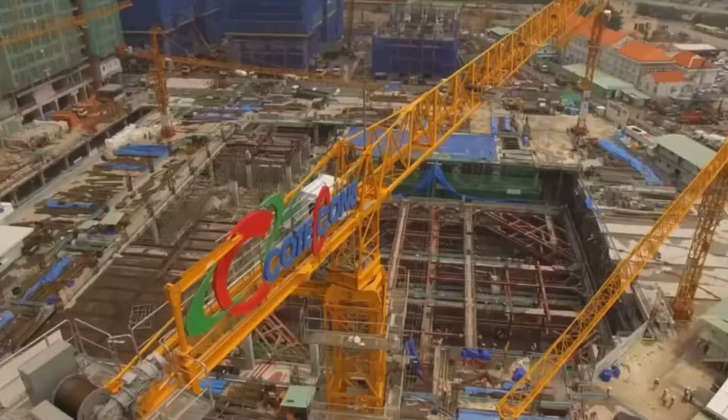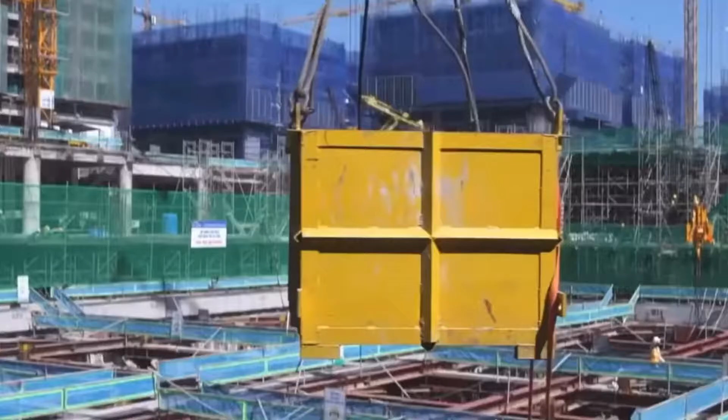The construction industry is a major contributor to the economic development of Vietnam. Today, our team will help you have a closer look into this intriguing industry.

In the past 2 weeks, our team has been at Constrexim CDC Hanoi to learn about the company's current situations and the difficulties it is facing. We had a chance to talk to the CEO and some workers to have a broader look into the company and the construction industry in general.

From here, various models and methods have been developed to detect main problems, figure out big ideas, and calculate the cost of the problem and the solution. In the first section, we will provide you with some basic information. The first part is executive summary.

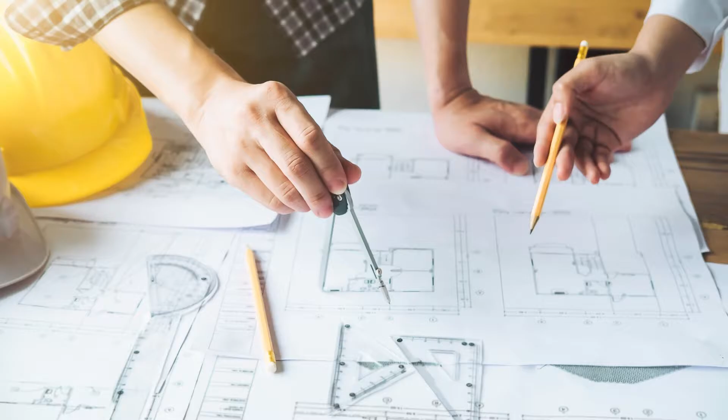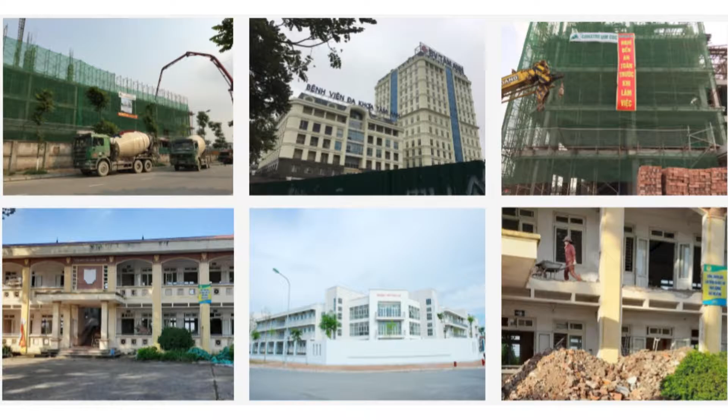Constrexim CDC Hanoi Joint Stock Company is a member company of Constrexim Construction Investment Joint Stock Company, Constrexim Holding. Some of the main areas of activities are architecture activities and technical consultancy, construction activities, and commercial activities. During 10 years of development, the company has participated in the design and construction of many projects and is highly appreciated by investors and partners such as Tâm Anh Hospital, Phúc Lợi High School, and Long Biên District Medical Center.

Despite its success, the company still had a number of problems with their construction projects. Our research has as its motto: money now, least risk, least effort. These 3 criteria have developed a solution that is cost-effective and quick in return, allowing the company to manage construction projects more effectively and save more than about $60,000 per project. The second part is the Ishikawa diagram.

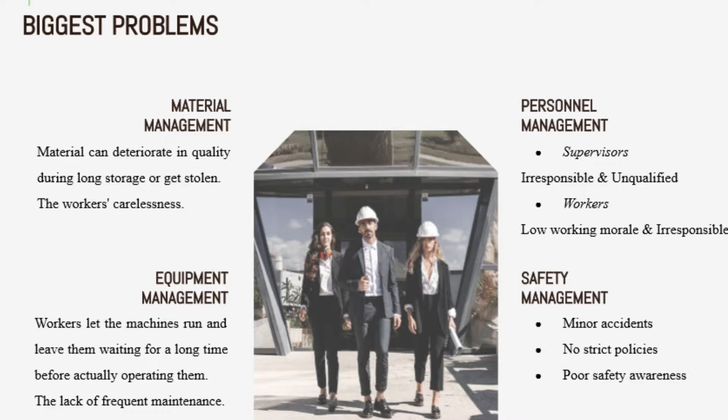After conducting interviews, touring the office and the construction site, and gathering data, we have concluded that inefficient management on the construction site is the biggest problem, including the management of equipment and material on site, workers, and safety. The cost of inefficient materials will cost roughly 1 billion Vietnam dong.

Equipment inefficiency costs 500 million Vietnam dong. If building site workers don't follow instructions, they risk causing errors that cost the company 50 million Vietnam dong. There have been a few minor accidents on building sites which cost about 15 million Vietnam dong.

In conclusion, the inefficiency in managing methods on the construction site can potentially lead to a loss of $69,000 in total, as we have weighed and calculated the cost of each factor.

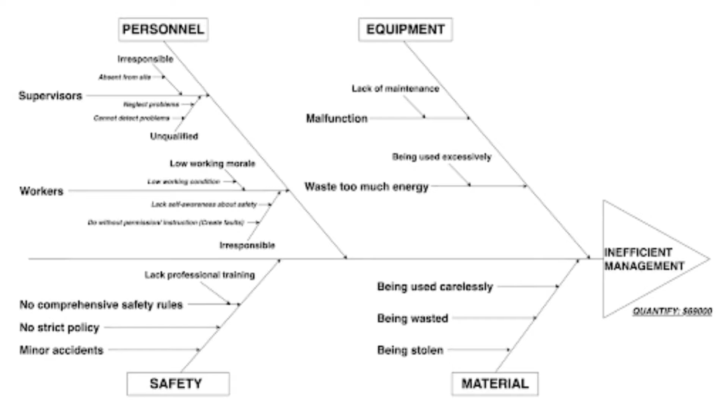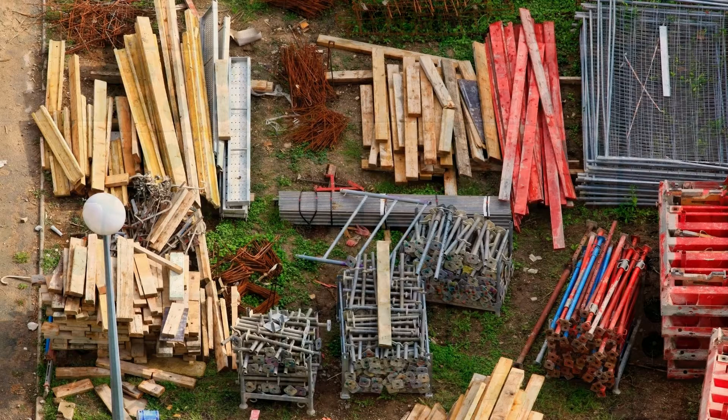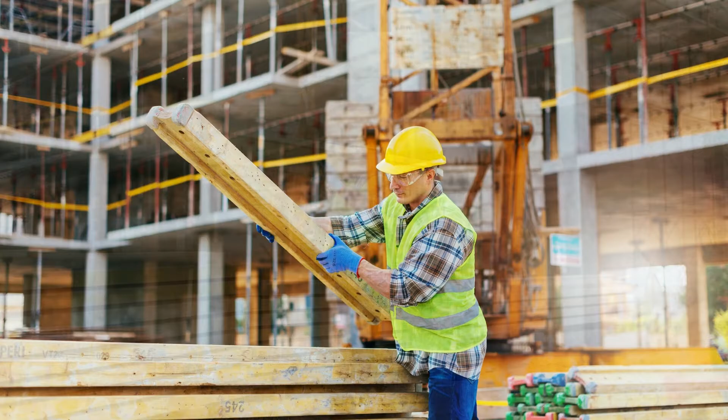First, we have material management. The first and most pressing problem is the management of material on the construction site. Issues arise when the construction site manager team works on material quantity planning and estimation. The site manager frequently places orders larger than anticipated because they want materials to always be redundant and available on site, which can cause deterioration in material quality during long storage or lead to theft. The workers' carelessness when handling items is another problem with material management on construction sites.

The second problem is equipment management. On the company's construction sites, it can be seen that the equipment is not used effectively. Workers at construction sites frequently operate devices without a clear plan or guidance. They let machines run excessively and leave them idle, while the cost of fuel and energy goes up.

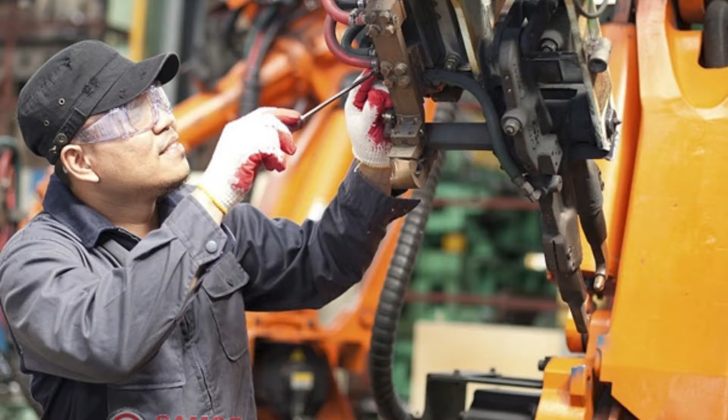The second issue is the lack of frequent maintenance for machines. In addition, equipment that is malfunctioning and not available when needed will affect the progress of the whole project.

The third problem is personnel management, specifically about supervisors. Although Constrexim CDC Hanoi has built up a team of supervisors, the absence of some supervisors at the construction site often occurs. The second problem is about the inspection and supervision process. Most supervisors still do not follow the process properly, and there is neglect in supervision.

During the construction process at the site, there are still many cases where construction supervisors or workers do not detect issues in time. Construction supervisors work independently, not in close coordination with related parties. For Constrexim CDC, this problem causes many inadequacies because of the lack of close cooperation between workers, supervisors, and contractors. Regarding workers, low working morale and long working hours with little rest have a negative effect on the health and morale of employees.

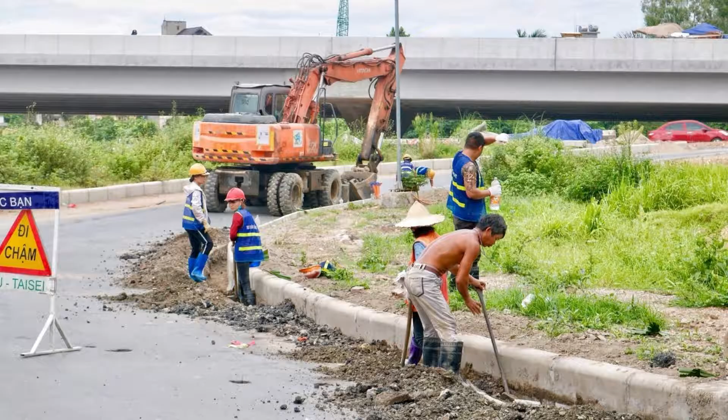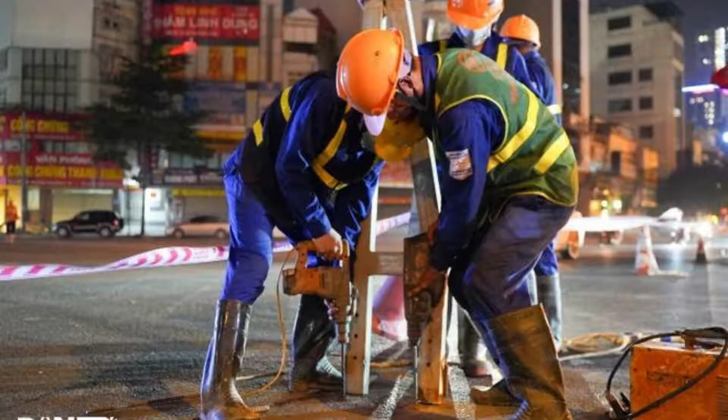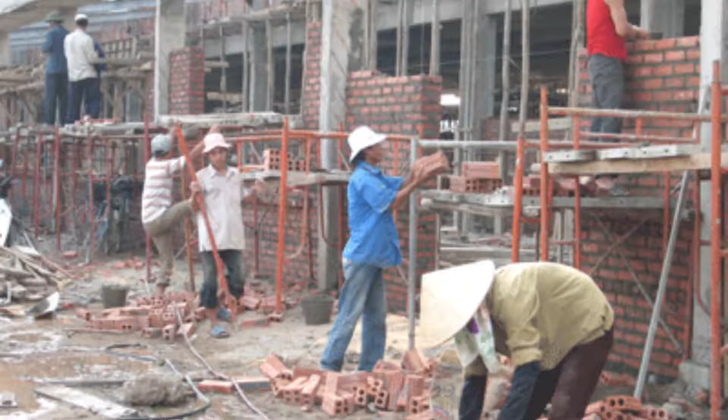The construction industry is a very specific industry with difficult working conditions, and many workers act irresponsibly. Most workers still do not have a sense of implementing safety measures in accordance with regulations. Although the company sends guidelines directly to workers before construction work, most workers still work according to habits and instincts, ignoring the proper processes.

The final problem is safety management. Thanks to many standards and safety precautions that help prevent injuries, there have been no deaths at Constrexim sites. However, there have still been minor injuries. There is also a lack of clarity in the reward and punishment policy, which leads to irresponsibility among workers regarding their own safety.

Poor safety awareness. The third barrier component is poor safety awareness. Two barriers are found in this component: lack of professional training and no comprehensive safety rules.

About the decision-making matrix. We use the decision-making matrix to evaluate the importance level of solutions based on three criteria: money, least risk, and least effort, with points 10, 9, and 8 respectively.

The budget for routine maintenance is $8,000. We suggest the company has small training sections and the cost is $2,000. It is also a great idea to have a reward fund that costs $1,500. Another important thing is that they need to empower 4 people to manage 4 fundamental sections: material, equipment, personnel, and safety. It only takes time. By summing up all the points, we can evaluate the priority level of solving problems.

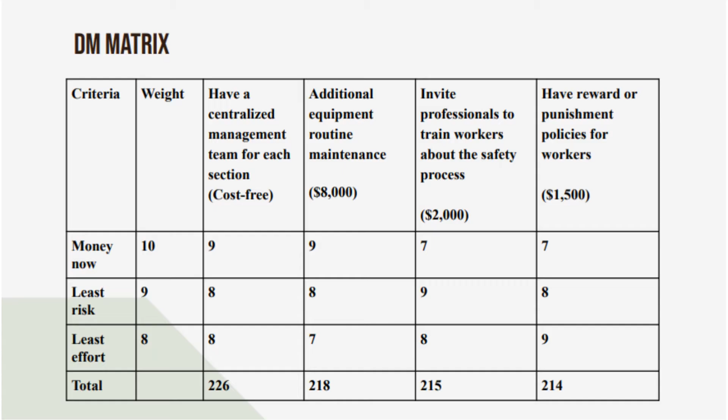About the standard operating procedure, the first one is existing SOP. The flowchart below illustrates the standard operating procedure that Constrexim CDC Hanoi is applying.

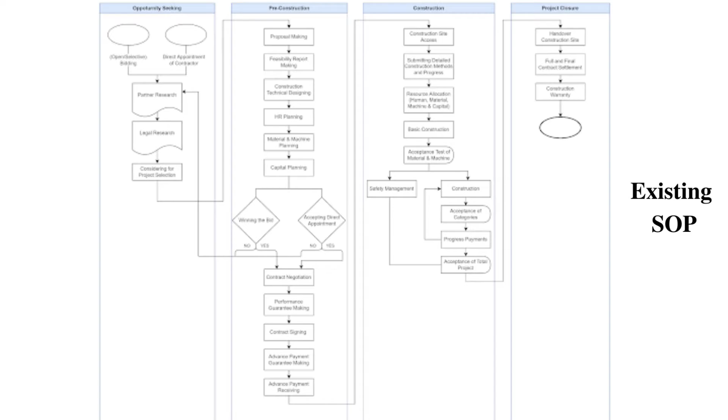The second one is proposing SOP. In the proposing standard operating procedure, we suggest 3 main changes. We intend to focus on minimizing the time for legal procedures and acceptance work. First of all, we have recommended the company arrange as much legal-related work as possible to deal with it at the same time, with the purpose of reducing costs and time.

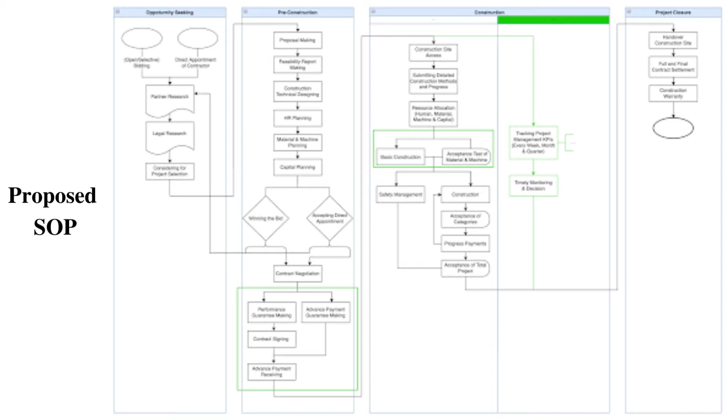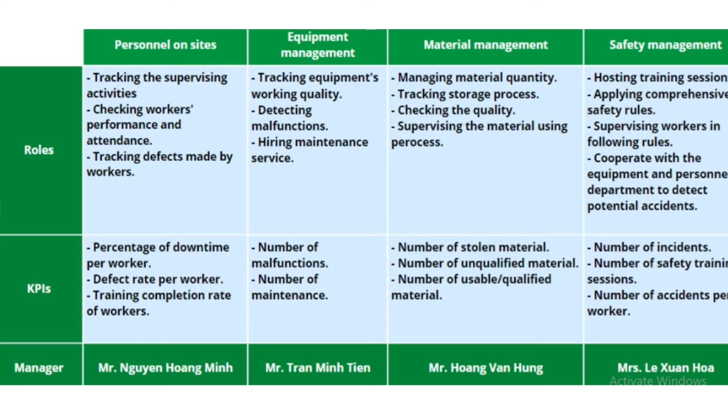The second one is organization grid. For the organization grid, we focus on the departments that are directly in charge of the construction site.

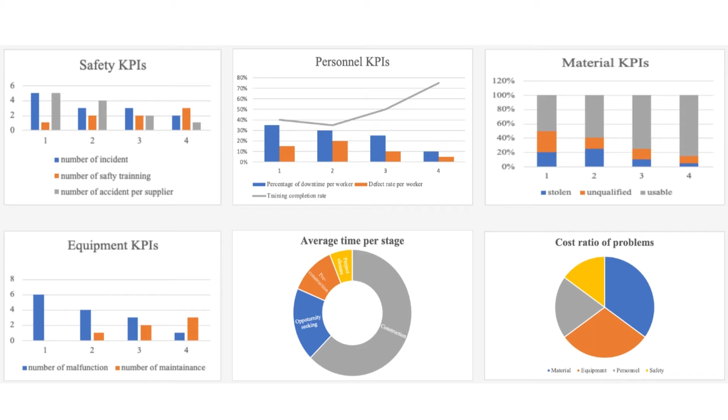About the executive dashboard, we developed an executive dashboard with key KPIs for 4 crucial variables so the business could manage construction projects more effectively and determine whether a task is on track. In addition, there are 2 charts that show the average time for each stage of a construction project, including opportunity seeking, preparation, construction, project closure, and the cost ratio for 4 problems.

Next up is a solution. After detecting the problems, we are thinking of changing the steps of the existing SOP to make them more specific. Firstly, we suggest the company should have a centralized management team for sections: safety, personnel, equipment, and material.

Secondly, we propose using a machine management system to heal the process while limiting the danger at site. Using the construction equipment machine management software, keep track of the equipment machine utilization ratio, set time aside for inspections and maintenance, know the equipment's limits, and build a system for handling equipment requests and returns.

Managers will be responsible for recording workers' opinions through a management information system. The company will provide a fingerprint attendance device every day on site. The construction site will have increased supervision and security cameras.

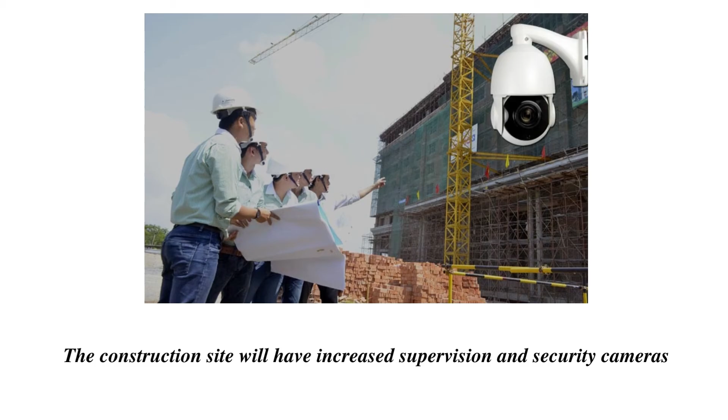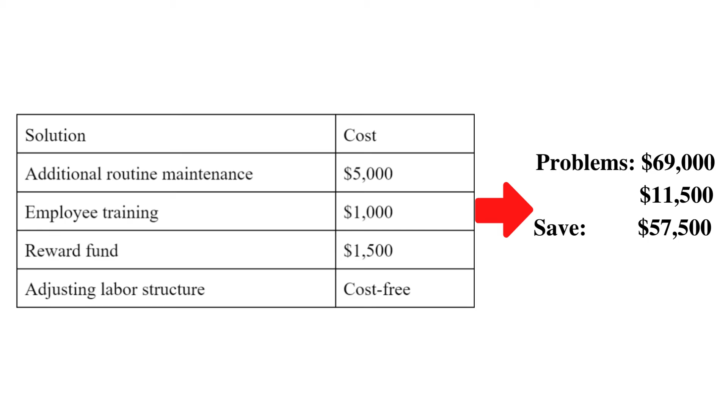Thirdly, we would like to provide workers with adequate knowledge about risk and safety by inviting safety professionals to train them. The final solution, we also mention the reward and punishment policies for workers. This can be a motivation boosting people to be more aware of their task and work better.

We have had such a great experience learning more about the fascinating construction industry together, applying all the models and theories we have studied in school, and helping a company with its issues.